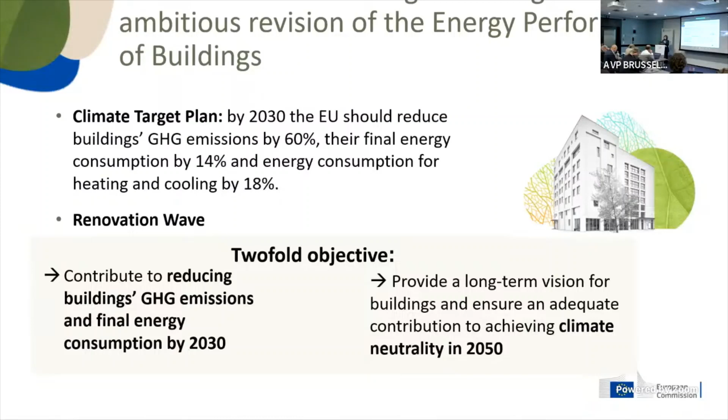It was analyzed, and it was a very clear contribution from stakeholders, that the vision existing in the current directive was, from this perspective, outdated. It was not really having in mind this 2050 objective, and therefore it required an important revision from that point of view. This, of course, touches on new buildings, which I will also look at in more detail.

So zooming into a bit more detail, within the revision, what we have this time around, as opposed to the revision that was part of the Clean Energy Package, is a very fundamental revision of the directive, a very broad one.

So in 2016-18, with the Clean Energy Package, the main aim was to make sure that key modernization aspects were introduced, that a strengthened focus on renovation was included, but at the same time there was an effort made to keep the revision quite targeted so that implementation would continue in parallel. This was very important, in particular for the 2020 targets included in the directive for nearly zero energy buildings, and the progress on energy performance certificates. So we didn't want to put all that on hold, and therefore it was chosen to do a targeted revision.

This time around is a very fundamental one. It touches on all aspects. It's quite a transformation as regards renovation, with the introduction of minimum energy performance standards. It also goes very far as regards the decarbonization of buildings for the reasons I have explained.

It looks very much into the technical building systems - heating, cooling, ventilation - but also into everything that has to do with digitalization, including everything related to energy performance certificates, infrastructure for sustainable mobility, and finally, but also very important, the link to finance. This is really fundamental, in particular for existing buildings.

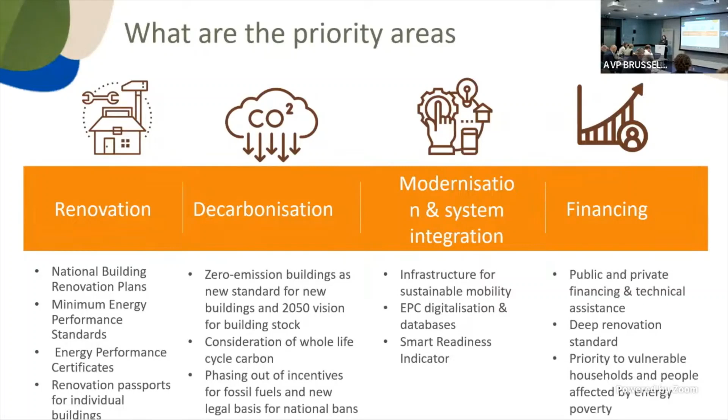And this, of course, shows in the energy bill, so it's something very relevant to tackle. But then the question is how to do it in practice, and how to also give a very clear signal to the financial sector so that financing flows into buildings, into renovation, considering that it's also a very granular sector. It's often less attractive from the financial point of view, because it requires quite a lot of effort, of aggregation, of technical assistance, and therefore the signal from the legislative side needs to be very, very clear, so to make it work.

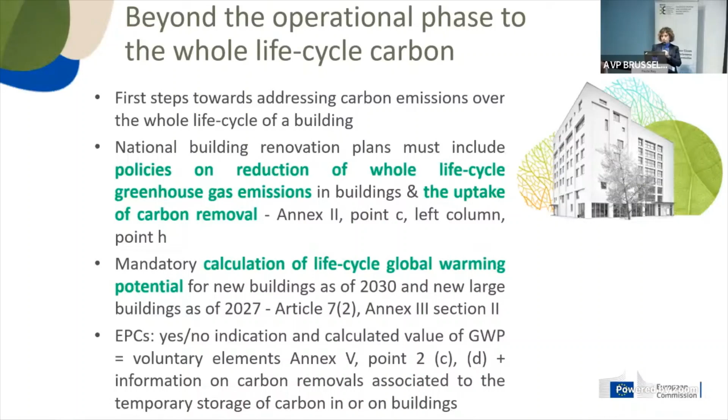It was also mentioned, of course, the impetus that we have with REPowerEU, with a strong support for renewables, for heat pumps, for solar, for energy efficiency. And this has resulted, in parallel to the negotiation, but now fully embedded into the revised EPBD as it is being discussed by Council and Parliament, an amendment on solar energy in buildings, a specific one, which has become the new Article 9A of the directive as negotiated.

And here as well, for new buildings it is also more ambitious. It concerns not only installations on new buildings, but also a much more thorough consideration at the design phase, so that when a building is being designed, the potential for solar energy is maximized, and this is taken into consideration at that point as well.

Of course, we also need to look at the feasibility. So for this reason, the article also includes the provision for member states to look into these aspects in more detail and to really set the detailed rules for implementing this article and possible exceptions. But still, this is really important, as it was mentioned in the introduction, if we are to deliver on the REPowerEU objectives and to reduce dependency from imports of fossil fuels.

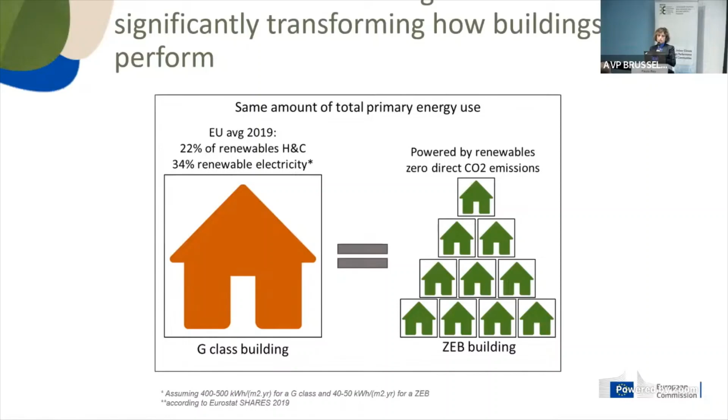So it is really towards the Parliament now that it is important that you make your inputs regarding this directive. So this was it from my side, but of course happy to get questions now or later if more practical. Thank you.

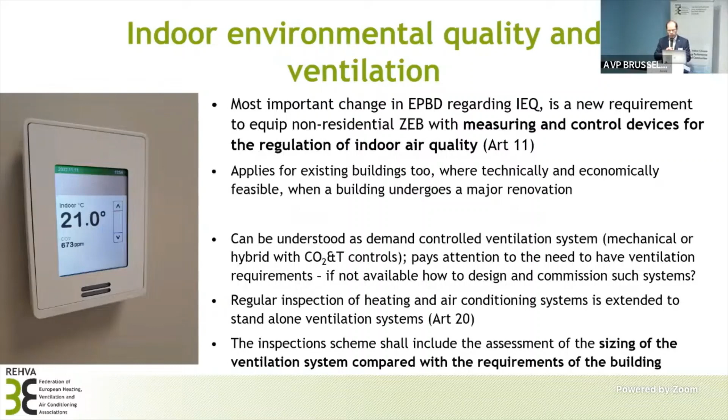It is also stressed in the inspection that standalone ventilation systems should also undergo inspection. And the inspection scheme requirement includes what the sizing of a ventilation system should be compared with the requirements of the building. Here, once again, there is a reference to the requirements. And yes, these requirements are to be specified on a national basis because they are not specified in the directive.

So it was already in the previous version of the directive that negative effects such as inadequate ventilation should be avoided. So there is no change. This is indeed continuously very important.

But now indoor environmental quality is stressed both for new buildings and major renovations. And it is clearly stated that the issues of healthy indoor climate conditions shall be addressed in Articles 7 and 8. So this, I would say, also could be interpreted so that national regulations should be placed for the IAQ and minimum ventilation rates.

And why is ventilation so important? Because the main issue in the directive, as Paula told us, is this renovation, to boost deep renovation, to transform the building stock to zero emission by 2050. And if ventilation will fail in the renovation, then indeed consequences can be very serious.

So we very well know that additional insulation and replacement of windows will block the air change if a ventilation system is not installed as a part of the renovation. And then you can end up with mold problems and any other IAQ problems. And that's a serious business to be addressed in the implementation of EPBD nationally.

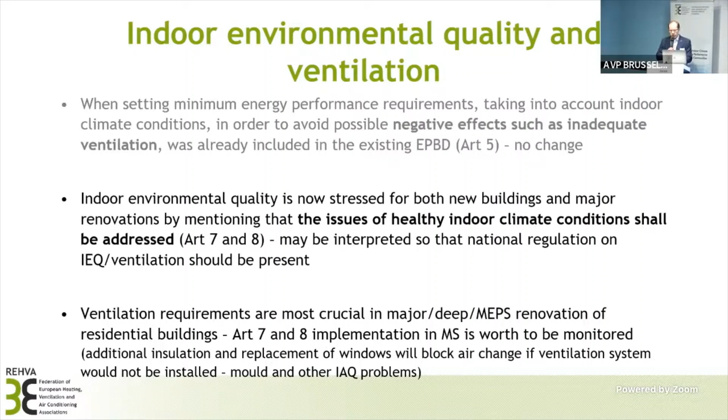And here we speak about which primary energy to be used, because there is quite an unspecific expression of the primary energy, and it's not always clarified, but in some places it's clarified, whether it should account for the total or just the non-renewable primary energy. And this is also important for the energy performance scale.

So basically in this procedure, when you take this nationally, I can list 5 steps every member state will need to do to issue all the national requirements required to implement this directive.

So first step is to define the assessment boundary. There are good definitions in the directive saying that assessment boundary is the boundary where delivered and exported energy are measured or calculated. This assessment boundary definition can depend on what's the practice to install energy meters nationally. There are a couple of practices in Europe, not only a single one.

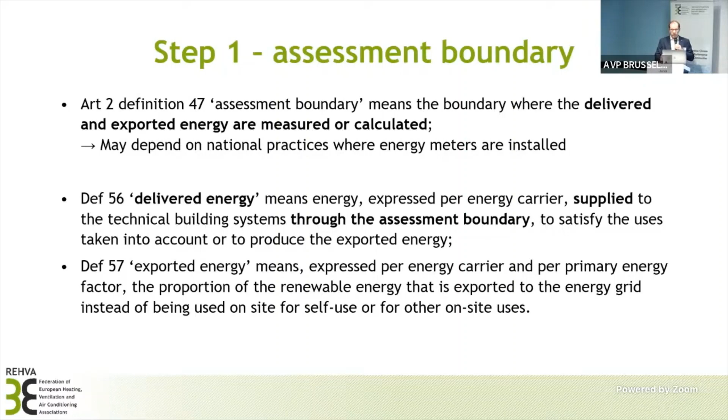So when calculating total and non-renewable primary energy, it is said in the definitions quite clearly that primary energy is calculated from the delivered energy, and calculating non-renewable primary energy is very straightforward. But when we go to total primary energy, there are a couple of options.

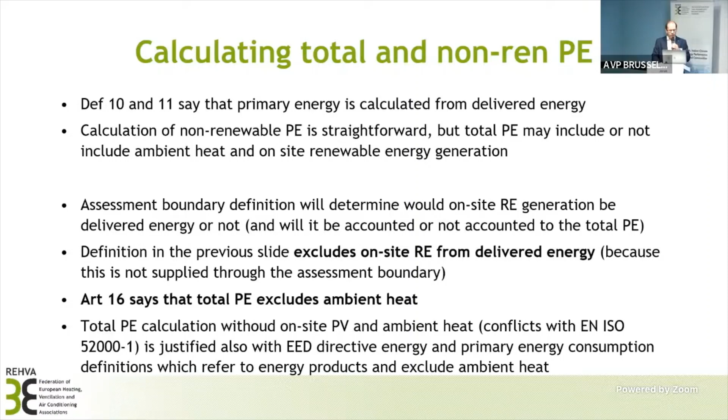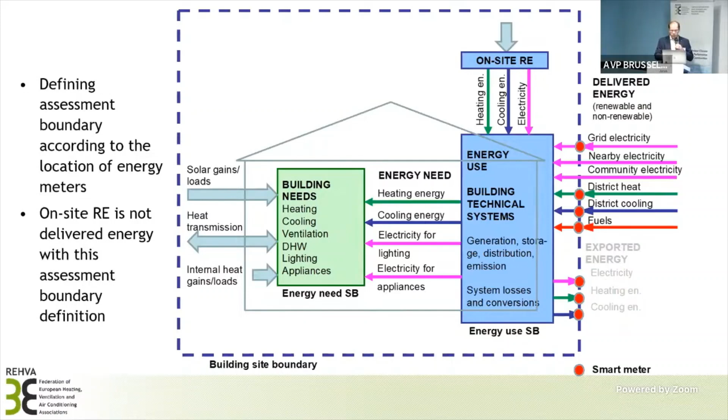And then how to calculate on-site photovoltaic or on-site renewable energy production - would that be accounted inside the total primary energy or not? That would depend on how the assessment boundary is specified. If it's as in the last slide, on-site renewable energy is not delivered energy because it's not supplied through the assessment boundary - it's inside the assessment boundary, and would not be calculated into total primary energy. Sounds complicated, but this is very important.

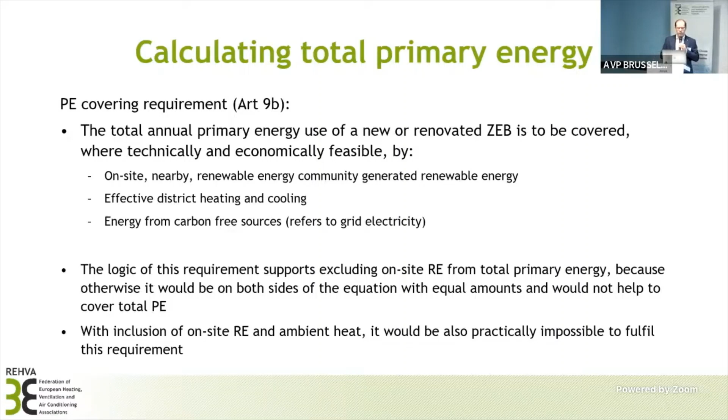And especially there is also a good hint in the ZEB requirement, where total primary energy needs to be covered by on-site, nearby, or community generated renewable energy, also by effective district heating and cooling, and then finally carbon-free electricity from the grid. This requirement's logic supports that you don't put photovoltaic on both sides of the equation, because in such a case it does not help to cover this total primary energy - referring that total primary energy is intended to be calculated from the delivered energy, so energy delivered to the building site. If not so, then it would be very difficult to actually fulfill this requirement.

So there are also, let's say, step 2 cost optimal national calculations needed to set the requirements, and there is some guidance in Annex 1 on what needs to be taken into account when we speak about the numeric indicator of primary energy use. Annex 1 also requires recognizing benefits from district heating, cooling, and also the positive influence from renewable energy generation.

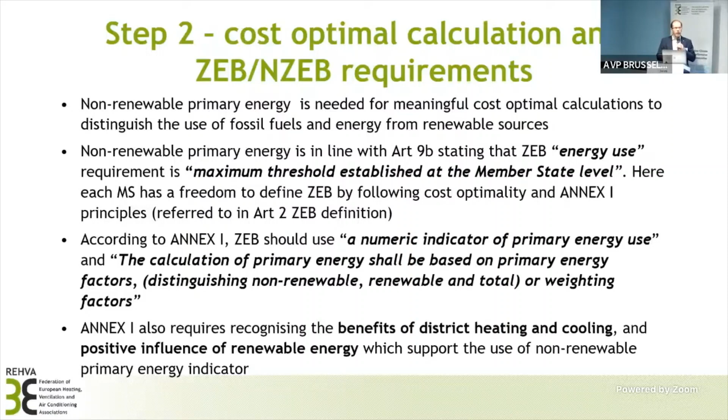I will show one example. It is published in the REHVA journal, and I'm not going into the details, but basically this can be taken, in a cold climate, in the Nordic climate zone, as cost optimal data, or can be at least close to the cost optimal data. The calculation is conducted with 3 heat sources: district heat, effective district heat actually, air to water heat pump, and gas boiler. Then we compare them to see how the requirements based on these calculations could be nationally set.

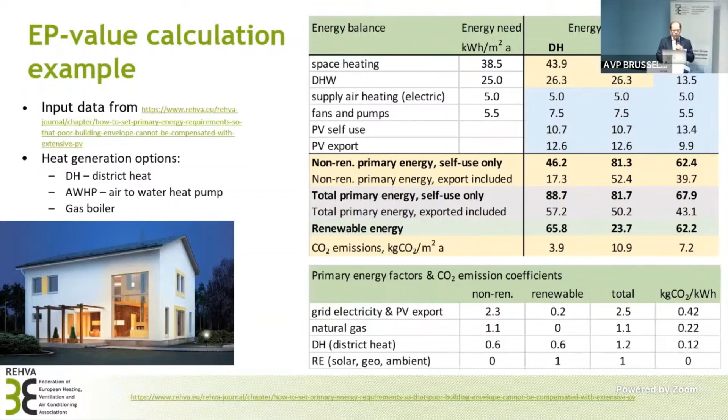So what is important to understand is summarized in this slide. For instance, for the air to water heat pump, we can see that the energy use of this all-electric building will be covered partly by the solar photovoltaic, and the rest from the grid. We also export something to the grid, but we don't account for this exported energy. Here the calculation of non-renewable primary energy and total primary energy will just use different factors - default factors from the overarching standard are used in this example.

So we get non-renewable and total primary energy values for all cases. And in the case of district heat or gas boiler, there is another delivered energy, which is either district heat or gas. It's interesting that district heat provides the highest total primary energy value, close to 89, while at the same time the smallest non-renewable primary energy value compared to all these cases.

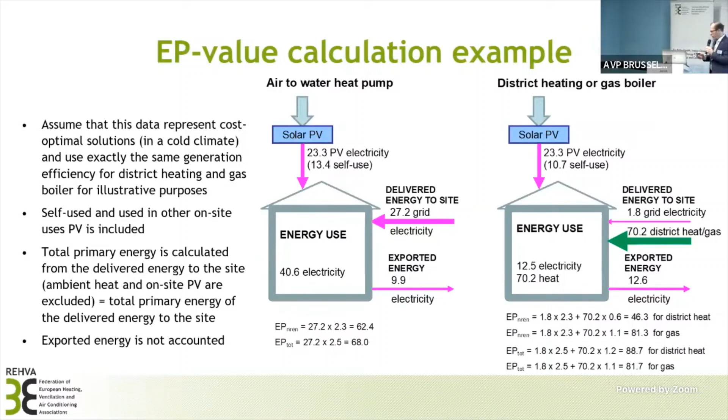So it very much depends which calculation approach and which primary energy factors would be selected to set these cost optimal requirements. If we would use total primary energy to set national requirements, then to enable the use of effective district heat, we need to take this highest possible value. So it cannot be smaller than 89, and then the gas boiler and air to water heat pump will very easily comply with this requirement.

But when doing so, being based on total primary energy, we did not actually follow the requirements in Annex 1 to take into account the positive effect of renewable energy. For that purpose, an additional numeric indicator must be set, and in this case a non-renewable primary energy value of 63 can be used to make it possible to use both air to water heat pump and district heat, while blocking gas heating.

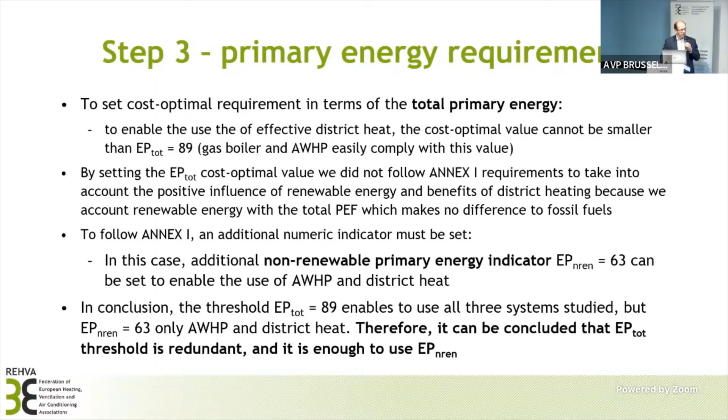In conclusion, we see that if we go with total primary energy, this will enable the use of all these heat generation systems, including the gas boiler. But if we go with non-renewable, then only air to water heat pump and district heat can be used. So it can be concluded that total primary energy would be redundant in this case, and it is enough to use only one indicator: the non-renewable primary energy indicator.

We also have this requirement that total primary energy needs to be covered. In the case of air to water heat pump, photovoltaic was not enough to cover this, especially because the default primary energy factor for grid electricity was so high. Calculating with this 2.5 ends up at a very high value, so the requirement is not satisfied, but for the effective district heat case it is satisfied.

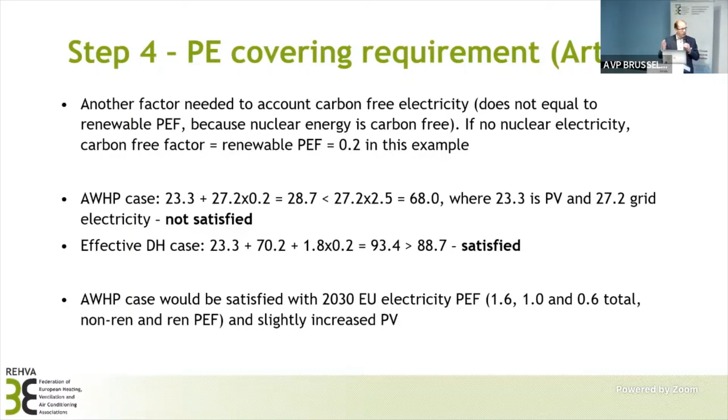When we also tried the calculation with 2030 EU electricity PEF values, which are 1.6, and slightly increasing the photovoltaic, it was possible to satisfy this requirement also for air to water heat pumps. So it is basically possible to fulfill this requirement in the future when electricity generation develops as expected.

Finally, the last step is that energy performance certificate classes also have to be defined, and one purpose of the EPBD is to harmonize these EPC scales. It is quite clearly stated that total primary energy needs to be used here, so we end up with a situation where non-renewable primary energy can be applied for the minimum requirements, but for the EPC classes, the directive says these should be based on total PEF in the current version.

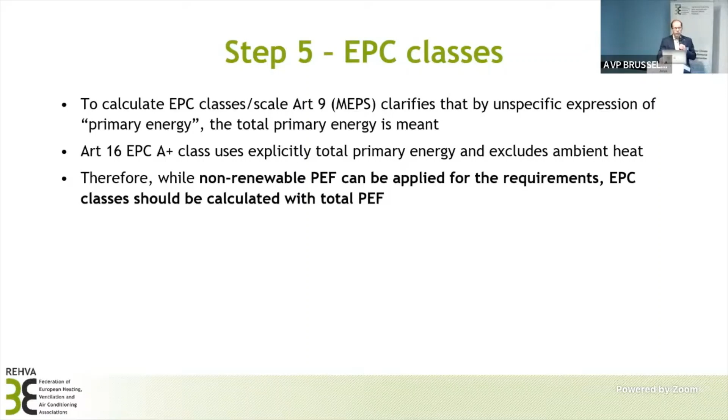So, to conclude: IAQ is addressed, but explicit requirements are the responsibility of member states, and very likely this new requirement for zero emission buildings can really make an improvement in construction. It would be nationally quite difficult to comply if IAQ requirements and ventilation requirements do not exist, so hopefully EPBD will provide a clear message to have these requirements

available at national level. This energy analysis showed that the non-renewable primary energy indicator can be used for the requirements, but for the EPC scale, total primary energy has been used. There are quite many factors needed to issue these national requirements.

We need non-renewable primary energy factors—that has actually been the current practice in most member states. Then we need a biomass factor—that has also been current practice, because this cannot be calculated with a non-renewable factor. And then we need a total PEF for EPC classes, which is currently not present in most member states, where this carbon-free electricity factor is new, so that nuclear can also be accounted for in addition to renewable energy. Finally, CO2 emission factors are needed to calculate the operational CO2, but these have also been in use already in many countries.

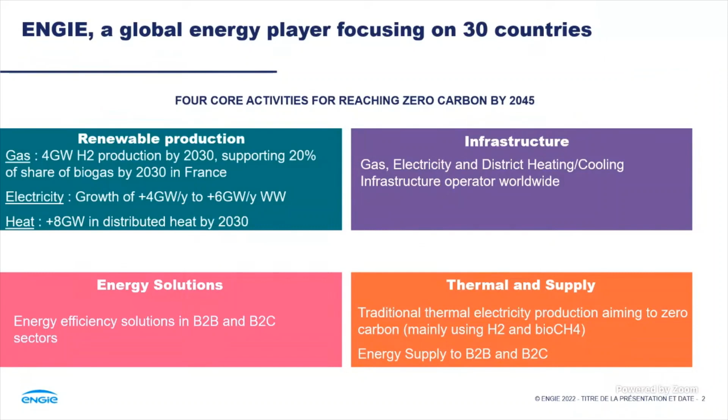Okay, reaching zero carbon in buildings - it's the roadmap from the point of view of ENGIE, the first 3 bullet points. Do I have a pointer here? Or no pointer? I will use that.

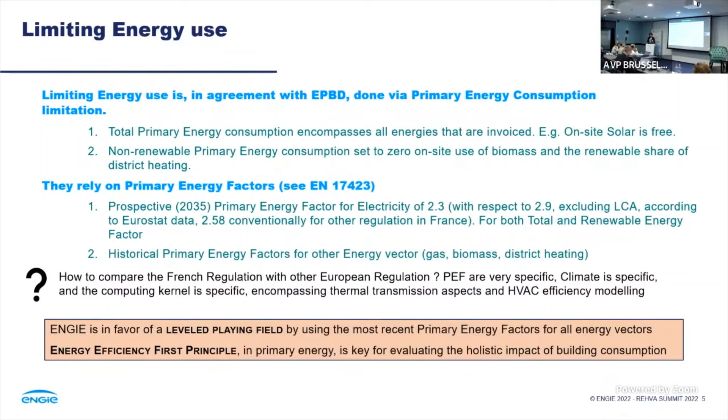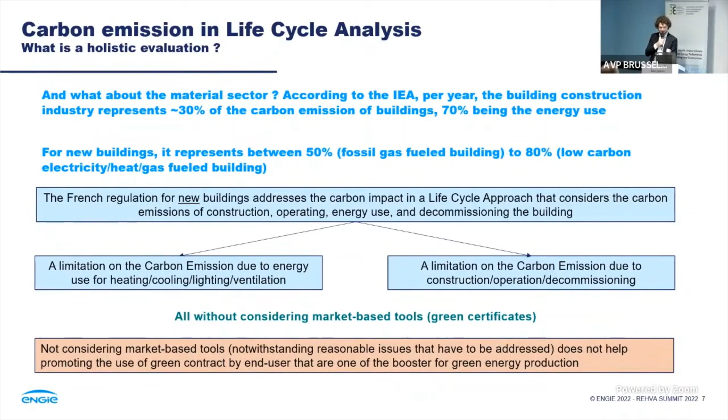Conclusion and openings here. Did I wonder if I missed something? No, maybe not. So the French RE 2020—regulation energy, the R and E are for regulation energy, the other way around—goes beyond the current EPBD in that respect, maybe not the next EPBD, with an LCA analysis for CO2 emission, which I think is a very efficient tool.

I did not go into the details of how it works in practice. Afterward we can discuss that, but I didn't want to go into technical details. LCA is also a mindset for me, because the interesting thing behind it is that it requires holistic reasoning.

For example, there are discussions these days on banning fossil fuel boilers. However, if you work in LCA, you also realize that behind your electricity, you have gas plants, or fossil fuel plants in general. Banning a direct use of fossil fuel would require consistently banning the indirect use of fossil fuel as well, which is a bit more difficult to do.

We have ideas, because in any case we have to go to zero in the use of fossil fuels, direct or indirect. And thus, for us, the energy efficiency first principle remains the main pillar in order not to transfer any significant impact beyond the scope of analysis. This is where LCA helps—primary energy factor also, by the way.

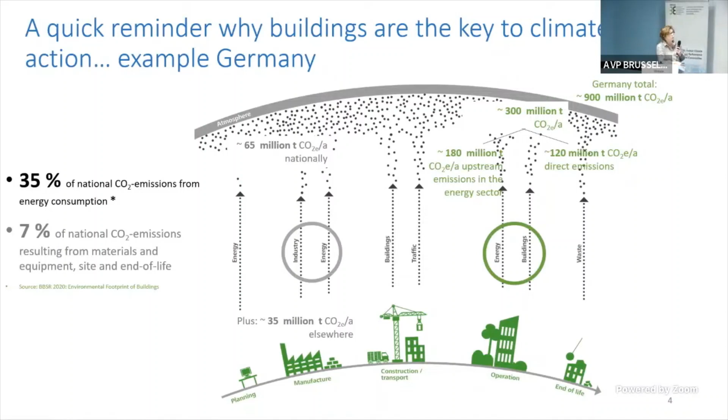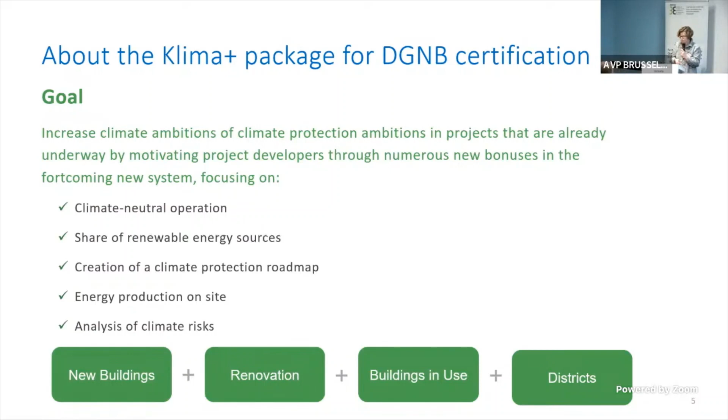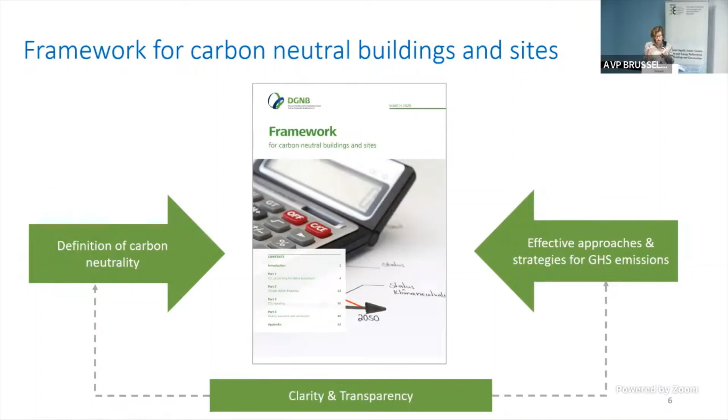In addition to the Klima Plus initiative, the DGNB also developed a framework for carbon neutral buildings and sites. There are two core elements designed to create more clarity and transparency for market participants: the definition of carbon neutrality - what does that actually mean - and then also what it means to have an effective approach and strategy for greenhouse gas emissions.

I will now go into a little bit more detail. It consists of 4 core parts - the climate action strategy. Part 1 covers the CO2 accounting. Part 2 covers the development of climate action roadmaps for individual buildings. Then the reporting via a climate pass, and then also verification processes.

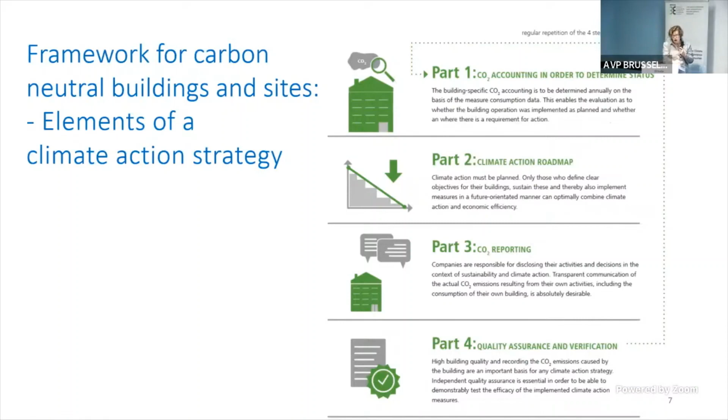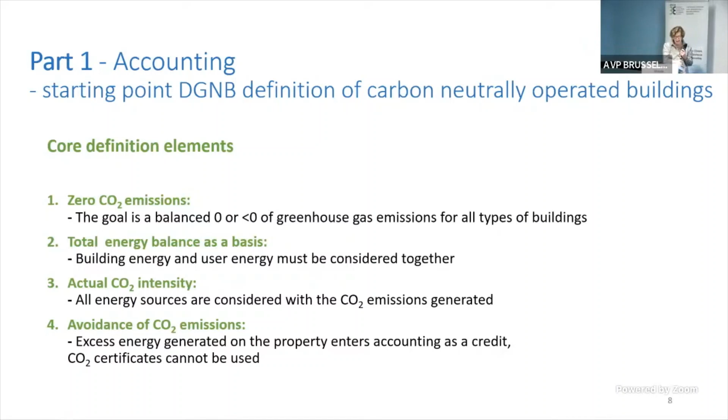And if CO2 emissions are actually avoided, any excess energy generated at the property enters accounting as a credit. CO2 certificates from elsewhere cannot be counted. So that's the accounting part of the framework.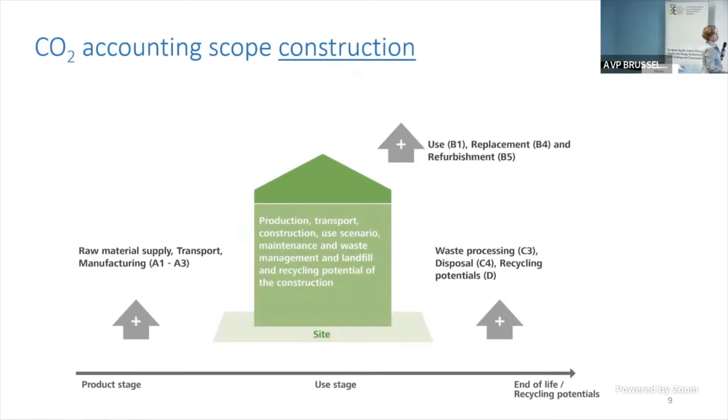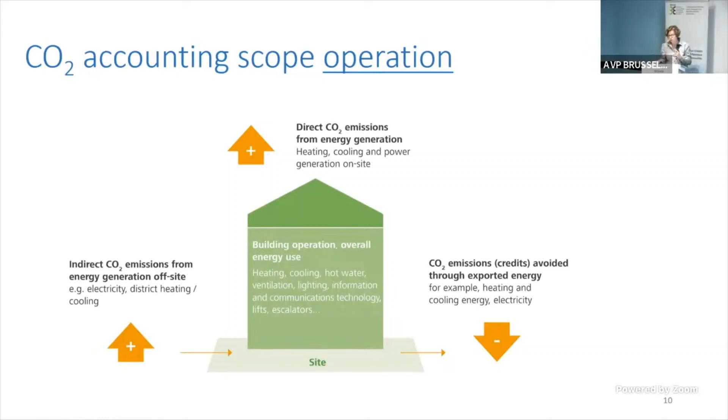Now this is just a practical example of how this works in construction. So basically you have here the site, but the whole accounting also takes into account the product stage and the end of life stage. And the same applies here - a practical example for operation, looking also at indirect emissions, direct emissions, and again the credits that I already mentioned for operation.

Moving on to part 2 - this is a core element of the framework - the development of the climate action roadmap. Because the DGNB very much feels that climate action and associated investments must be planned in a focused manner. Only if you define clear objectives for buildings and sustain these objectives, and implement associated measures in a future-oriented manner, can you actually optimally combine climate action and economic viability of the investment.

I've already said that this climate action roadmap has to be done for each individual building. So you cannot take a cluster of buildings and do that - you have to really take the effort to do this for each building individually.

So the creation of this climate action roadmap consists of different steps. Step one would be determining the initial condition. Step two, you look at potential analysis for relevant focus areas where you want to focus on your climate roadmap. Then you do the cost assessment of the measures, then the time planning of the measures and determining targets for that building. Step 5 is the documentation and quality assurance of the creation of the climate roadmap. And step 6 would be determining responsibilities and planning the first implementation steps for that building.

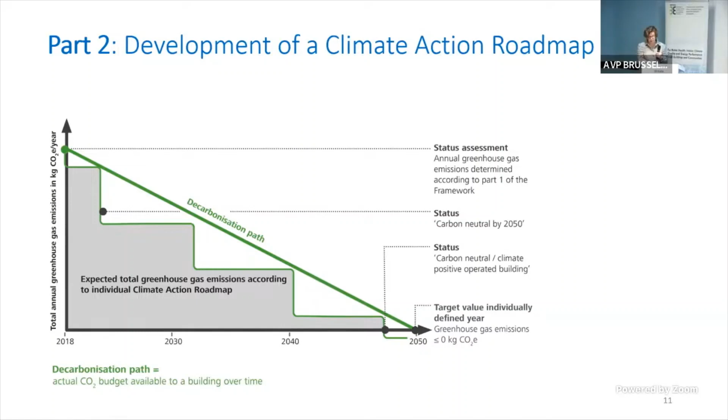Very closely linked to that, part 3 is the CO2 reporting by means of a climate action passport. This passport would contain the following information: a short description of the building, the total balance of greenhouse gas emissions, and relative key metrics using a suitable reference value, such as CO2 emissions per user, per unit of area, per hotel room, and so forth. If a climate action roadmap is applied, it would also state compliance with interim target values or any deviation from these values.

Now for the final part, it's very important—you can do all sorts of things, but if you don't verify whether you've actually achieved what you set out to do, it's pretty meaningless. That's why you need verification and quality assurance, which gives incentives for more climate action through DGNB certification.

My final slide picks up on the rather depressing figures I showed at the beginning for Germany. Ideally, what we want to achieve through this framework and the Klimapfad initiatives is to move buildings from being the largest source of CO2 to becoming an integral part of the energy transition—being CO2 neutral or even operating in a positive way, turning buildings into real CO2 sinks. To help market participants, there are a number of tools and pieces of guidance available on the DGNB website.

There are capacity building and knowledge transfer elements that support those initiatives—there's the toolbox, Klimaneutrales Bauen. I'm not sure whether that's also available in English, but it's worth checking out. This is the toolbox for climate neutral construction. With this, I conclude my presentation and look forward to any questions you may have. Thank you.

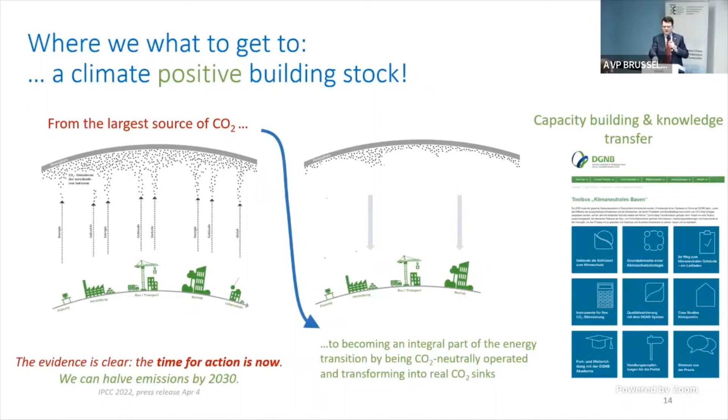Before that, I have to say that REHVA is preparing a new position paper, maybe two versions of one paper. The first gathering all technical details, presented to be understood by the scientific and technical world, and the other translated into simple words to be understood by the political level. This new position paper will underline the modifications we may need to see for the next revision of EPB content itself.

Another important aspect of EPBD is the transposition phase of this directive, focusing also on a common methodology for the calculation of energy performance in buildings. And then another very vivid topic is training and qualification—we need experts in order to put in place everything we discuss and have on our tables to reach all our targets.

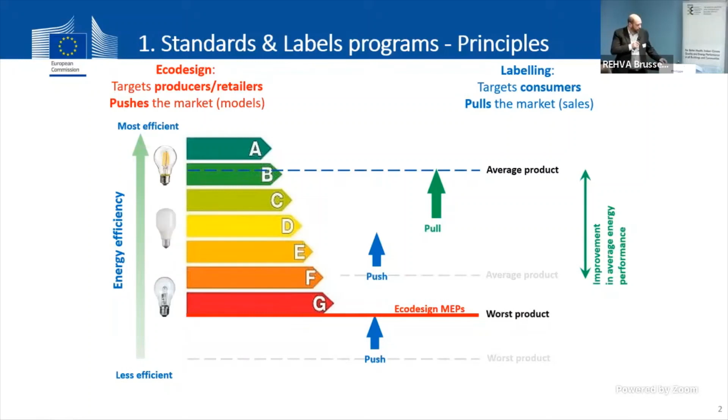This already exists for some time, and there are clear benefits we have evaluated that are not always well known. It's very important - about 1,000 terawatt-hours of primary energy saved in 2020, and it's just increasing because of the renewing of the stock of products. Of all these savings, a very large and important part is in heating and HVAC in general, but most particularly in heating appliances used in buildings. As per 2020, it's already about 7% of EU primary energy consumption saved, with an impressive amount of CO2 equivalent savings and also economic savings per household.

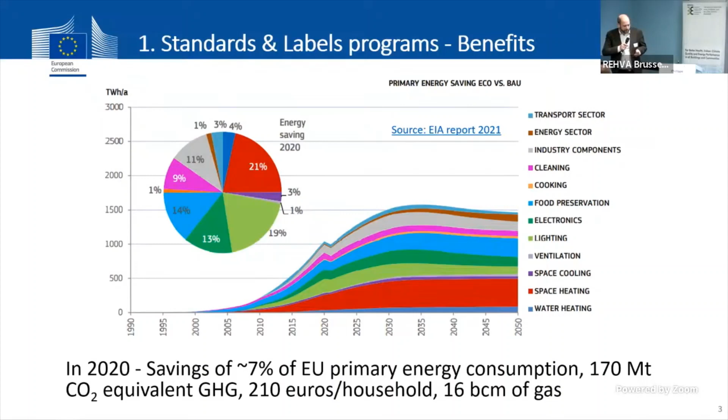So this is the past - this is the regulation we have already implemented. For instance, for heating, for the sector of boilers and water heating, the last regulation was implemented in 2013 and still has effects today.

If we look at this regulation, the main one is for hydronic systems, covering about 45% of EU buildings - mainly boilers and a small part of heat pumps. Solid fuel boilers are in another regulation. We also have a couple of regulations on local space heaters, typically electric heating but also wood stoves. I'll speak more about these two regulations because they are being revised, and we are presently discussing what the new label and new minimum performance requirements could be for these products.

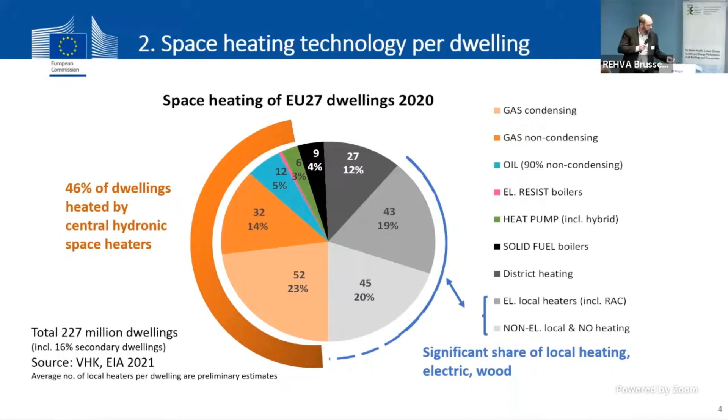If we start with local room heating, we've made the easy part, I would say. In the past we had basically 5 scales, meaning almost a scale per product type, so every type of industry was allowed to improve its products to the top level. But now, to have further savings, we need to combine all this on a single scale to compare the energy efficiency of the worst, most efficient, and best efficient products. In that sequence, you can see...

On the right side you have the heat pumps, all shown in primary energy efficiency, in the sense of the EED that we discussed this morning. Because heat pumps mobilize ambient energy, they are much more efficient overall - this is for a primary energy efficiency factor of 2.1, as presently in the EED. So heat pumps are in total much more efficient, while electric heating would be at the bottom, and combustion appliances would be under 100%. If we combine all this on a single scale, we know some people look at choosing among these different systems, so we can have much higher savings when there is a substitution. It doesn't mean all products will be substituted, and it doesn't mean it's forbidden to use wood, but there are savings in substitution, more than in increasing each product on its own.

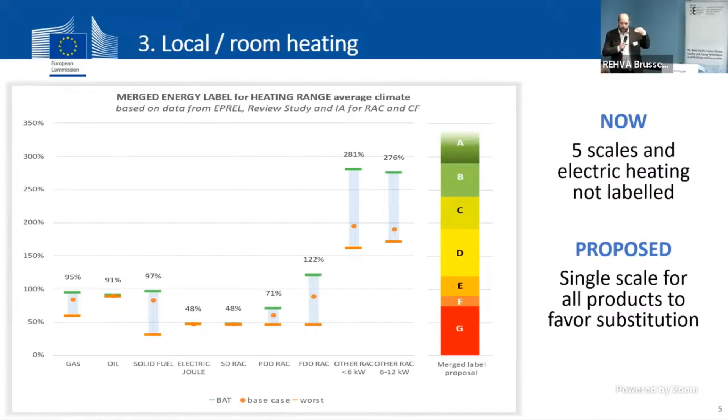If we look at hydronic space heaters, we can first take a look on the left. That's the scale translated with the new primary energy factor. That's the scale that is presently in force today. And here you have an idea of the distribution of products.

You can see that this big yellow pack is the condensing boiler. In fact, the main objective of the previous regulation was to shift from non-condensing to condensing boilers, and you can see the results on the side, that was very efficient. This was done through minimum performance requirements.

But the thing is that now the policy objectives have changed. We are moving to Fit for 55, and clearly we cannot keep this large part of gas boilers on the market and in the stock. We have to shift to more efficient solutions. That could be hybrid solutions, heat pumps, or cogeneration, but it has to be more efficient, or we will not make the objective that we have for 2030.

So the next target is in fact to remove condensing boilers, the same boilers that we have pushed on the market for the last 10 years. That's the way it is.

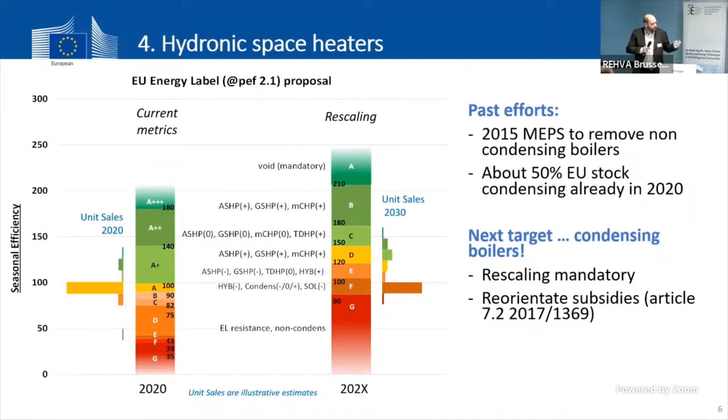But we already had a scale in place comparing different products, and this label has not allowed heat pumps to get on the market. So we were missing some other conditions to push the transformation to more efficient products. One important point is the installers. For these specific space heaters, we know that the opinion and advice of the installer is crucial for the end user.

We need, of course, to have the economic conditions in place. It means correcting the gas and electricity ratio, including the carbon price in gas prices, and also, at least temporarily, developing targeted subsidy or loan schemes for more efficient appliances.

And also, we need to try to avoid any distortion of the functioning of the internal market, because in our opinion, it's the best way that we have to steer heat pump costs down. So we have to avoid any particular national schemes that would require additional testing or additional barriers that would limit the functioning of the internal market.

And it also means that we have to look closely at how the different member states will choose to decarbonize their buildings, and in particular, how they will use the new provisions being inserted in the EPBD on the possible ban or limitation of heating systems in Article 11.

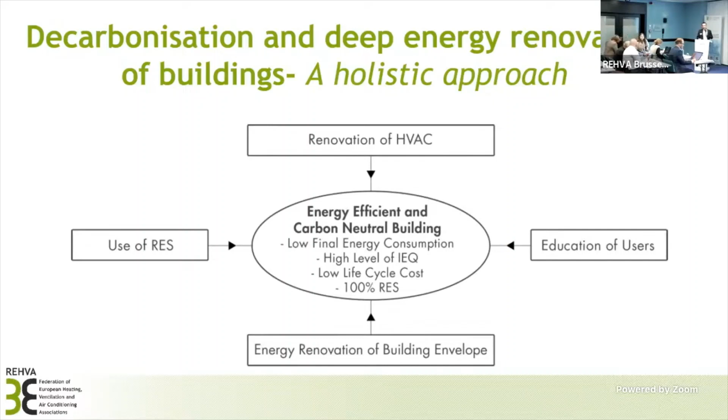and cost-effective concept on how to decarbonize buildings. So we also know that we should include as many aspects as possible to properly move to carbon neutral buildings. I think energy renovation of the building envelope is quite well known for us. However, how to renovate an HVAC system is also quite clear for engineers. But we should also include education of users, yes, we should include users in the process of energy management in buildings. And after we decrease the energy consumption, we should use renewable energy sources, somehow.

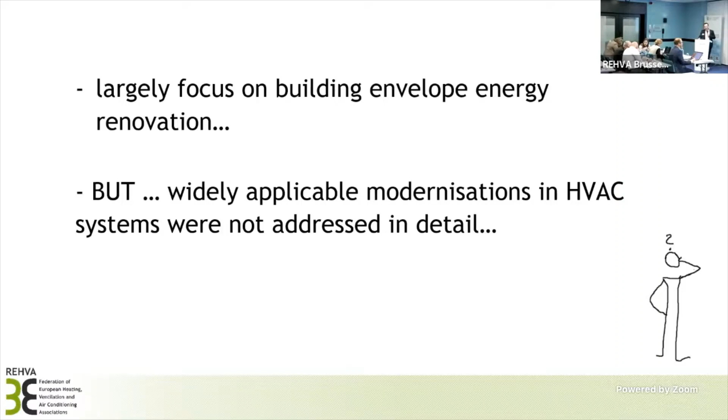I noticed, especially in Poland, that we largely focus on building envelope energy renovation. However, how to modernize the existing heating system, and how this kind of energy modernization influences final energy consumption, is not well known. It could be reached from the field measurements we already made and presented in this guidebook.

So we proposed the first step: how to decrease energy consumption in existing buildings, because we know that in new buildings you can do a lot of things, but in existing buildings it is quite a challenging aspect.

This guidebook is a consensus among different members, prepared by people from different countries, around 10 countries, from Nordic countries and from the South, so it is quite a consensus issue. We addressed all HVAC systems present in buildings and how to decrease energy consumption in specific systems: ventilation, heating sources, heating system, domestic hot water, and also cooling. We also underlined how education influences this process and how it should be included.

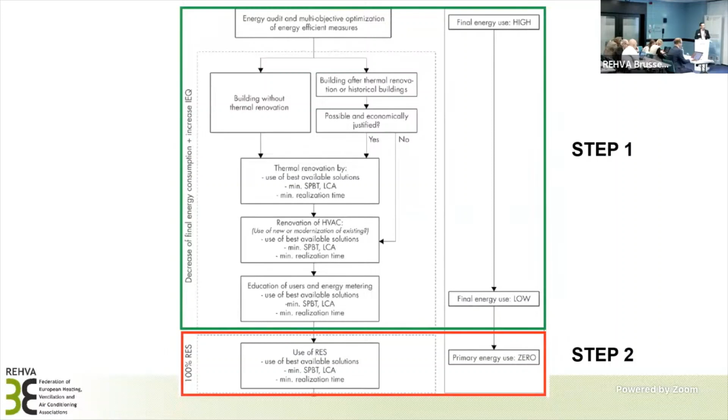Step one, described in detail in this guidebook, is how to decrease the final energy consumption in buildings, taking into account the best available solutions, how to minimize the payback time of proposed solutions, and how to minimize the realization time, because it's really important that energy efficient measures proposed in buildings are realized as quickly as possible.

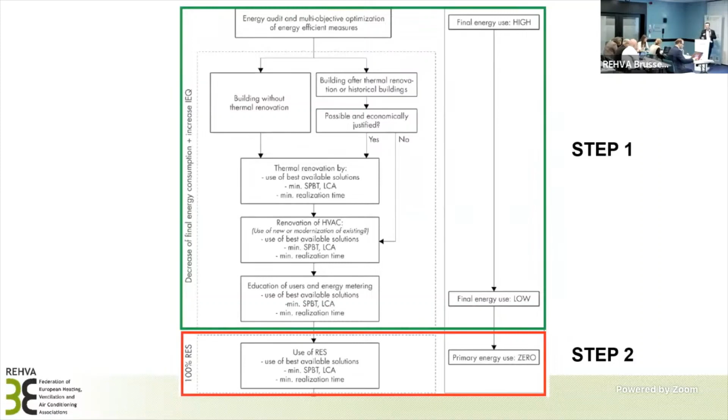Taking this into account, we can have some strategies, but especially in existing buildings we should also consider the needs of building managers and owners. What we propose should be easily implementable within existing buildings, taking into account the existing HVAC system, in order to maybe save some of it. Don't change everything.

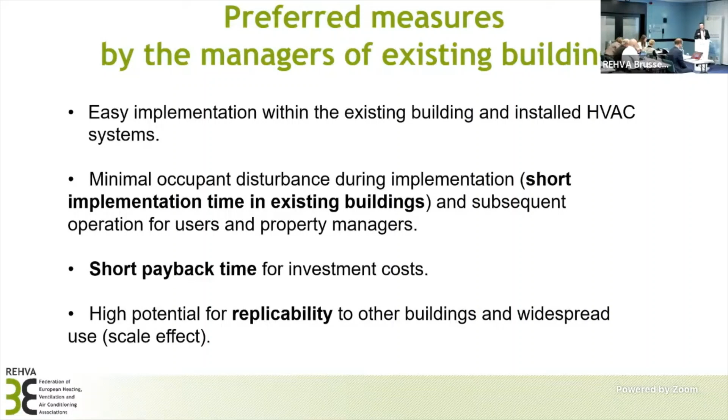We should propose measures characterized by short implementation time and short payback time, and if possible, solutions that are easily replicable in other similar buildings, because then another building manager may decide quite fast how to apply such a system. It will be a pilot case, good practice.

So in the framework of this guidebook and our activities, we proposed and showed a holistic approach which can be applied in existing buildings.

We also demonstrated this based on long-term case studies, which is a very valid issue, because in simulations you can prove something, but taking into account results from long-term field measurements and field studies is very, very important. We also know that different countries can have different renovation concepts, so what we presented is of a general nature, so you can apply these measures in different renovation concepts. That's also quite important.

So the second step, now that we've proposed how to decrease final energy consumption, is how to move to renewable energy sources. Different aspects will be addressed here because we also established an international task force with 14 experts from different countries and backgrounds—not only HVAC system professionals, but also experts in renewable energy sources, indoor environment quality, indoor air quality, and user education. So it will be a good consensus report which we will prepare.

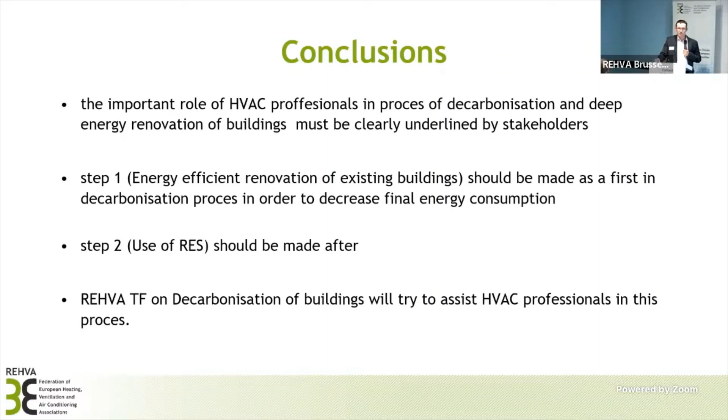And the last point is that we will try to assist our colleagues, the HVAC system professionals, in this process of decarbonization of existing buildings. Thank you.

Well, thank you, Thomas. Any fast questions to Thomas? Yes, please.

Thank you, Thomas. I'm always oversensitive for a statement like short payback time, because, well, first the question is what is short, but we all know that if you pick those short payback time measures, you will block the next measures, because the next measures will be, of course, more expensive in your economic calculations. So is it not better to oblige a total renovation plan towards zero carbon? You have to rank all measures and there are prices, but then you are sure that you inform your client that it's not something you can just pick your nice fruits out. You have to do them all.

Okay, thank you for this question. It is quite challenging when you combine different renovation measures, what will be the latest energy savings level, and taking this into account, what will be the payback time of the full renovation. But in order to adjust to different renovation concepts which are valid in specific countries, because it's not one general renovation concept, we have some kind of subsidies in different countries. We developed and presented different measures specified by different payback times dedicated to specific measures. Naturally we proposed what is recommended to be done in specific buildings.